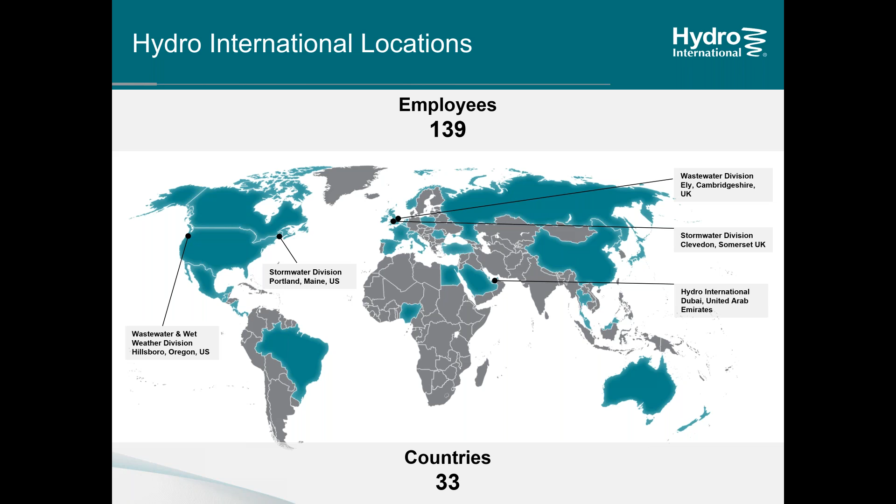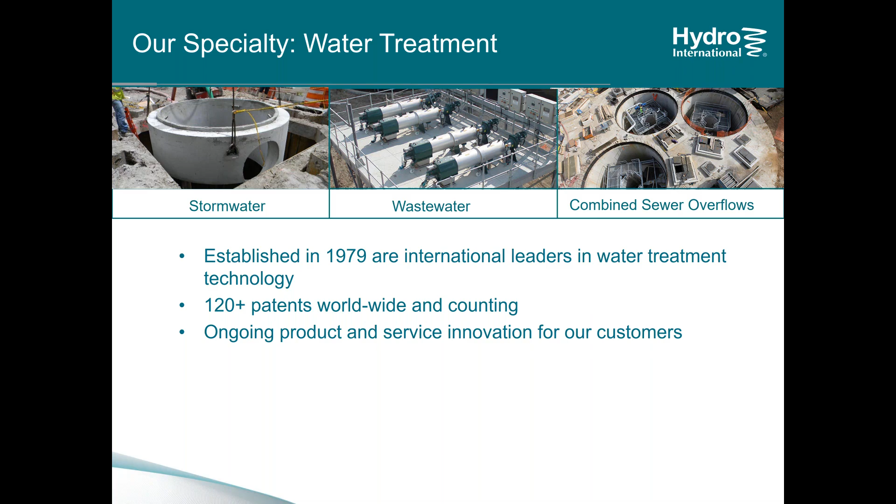Hydro International has installations all around the world. We operate out of offices in England, outside of Bristol, and on the east and west coast of the United States, Portland, Maine, and then outside of Portland, Oregon, in Hillsboro. And Hydro International does water treatment, stormwater, wastewater, combined sewer overflows. We've been at this for almost 40 years and have installations with all sorts of different applications.

In the last 10 years or so, there's been an increase of work on industrial settings, and we're happy to be able to help people in metal manufacturing and scrap yards and things like that manage their stormwater runoff.

We're able to do this largely because of a laboratory facility that we maintain in Portland, Maine. We have another hydraulics lab in England as well, and sort of a burgeoning one in Hillsboro, Oregon. This laboratory allows us to do product development and regulatory testing in our own facility.

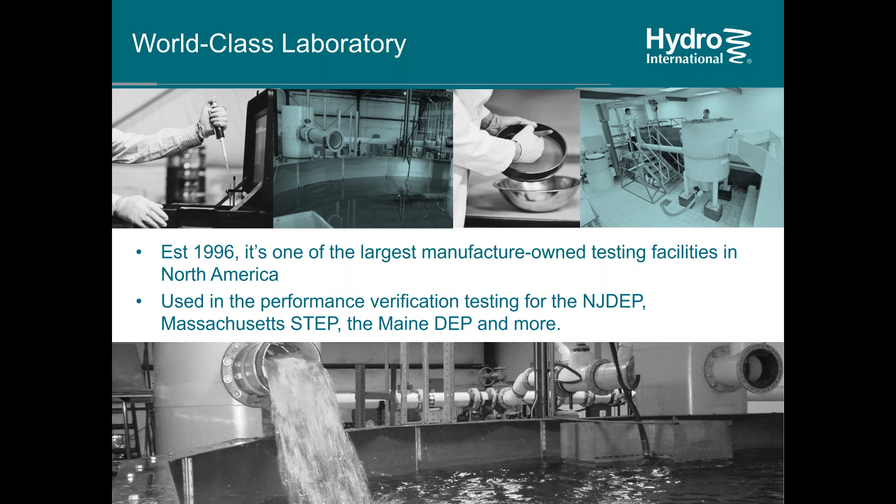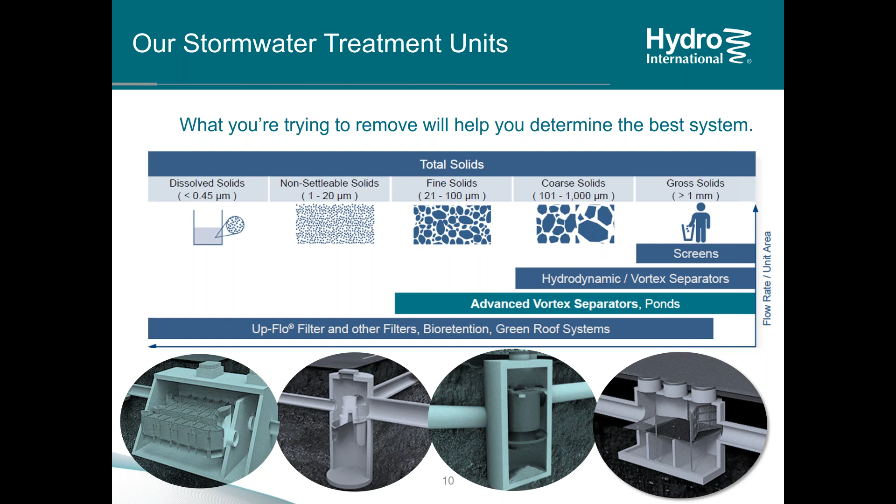Hydro's product offering spans the whole gamut of pollutants. Everything from very large gross solids that can be screened out down to materials that are non-settleable or dissolved and need to be filtered out. Hydro has products for each one of these performance classes. The one I'm going to be talking about today is the Up-Flo filter, and it's shown here in this computer rendering undergoing some maintenance, but this is the product that we use for stormwater filtration.

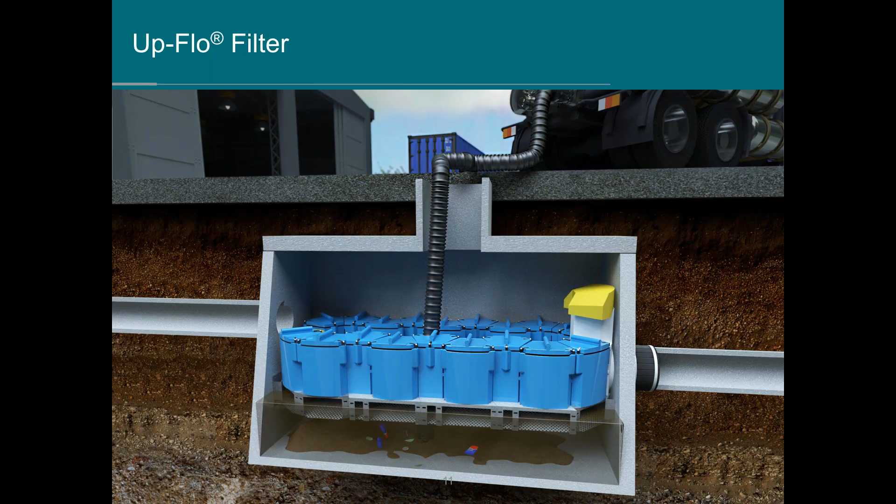And I'll just give a little bit of a sense of how this product works. It's pretty simple. The flow comes in through an inlet pipe, in this case marked A, and enters into a vault or a manhole and fills the sump underneath these blue filter cartridges. And in the Up-Flo filter, just like the name says, the flow comes up through the filtration media and is collected in sort of a manifold at the top of the modules, and then passes out to the outlet pipe marked H.

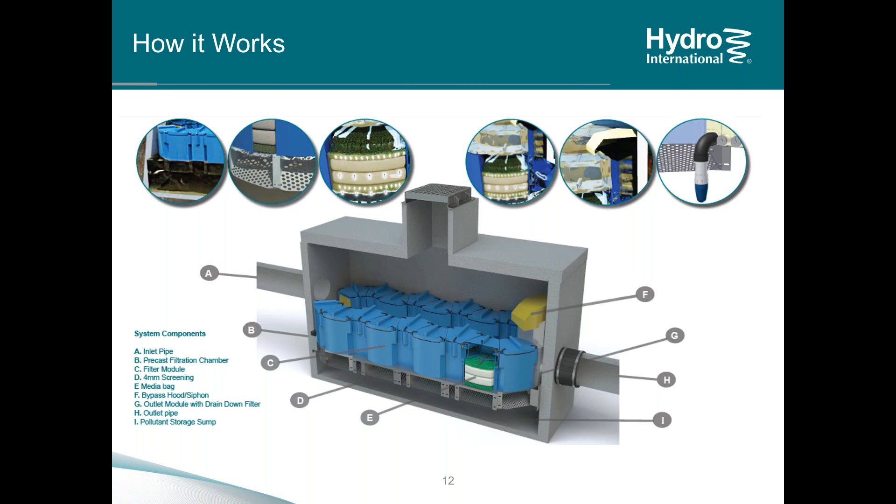The reason why we use upward filtration is essentially to improve maintenance longevity. You don't need to do maintenance as often. The filter material lasts longer in a fluidized condition, in a fluidized bed.

The technology was developed by Dr. Bob Pitt, who recently retired from the University of Alabama. He developed this, and if you were to Google Dr. Pitt, you would see lots and lots of papers that he has published during the development of this technology. Hydro purchased the intellectual property from Dr. Pitt and commercialized it as the Up-Flo filter. He developed it for the EPA as this product called the Multi-Chambered Treatment Train.

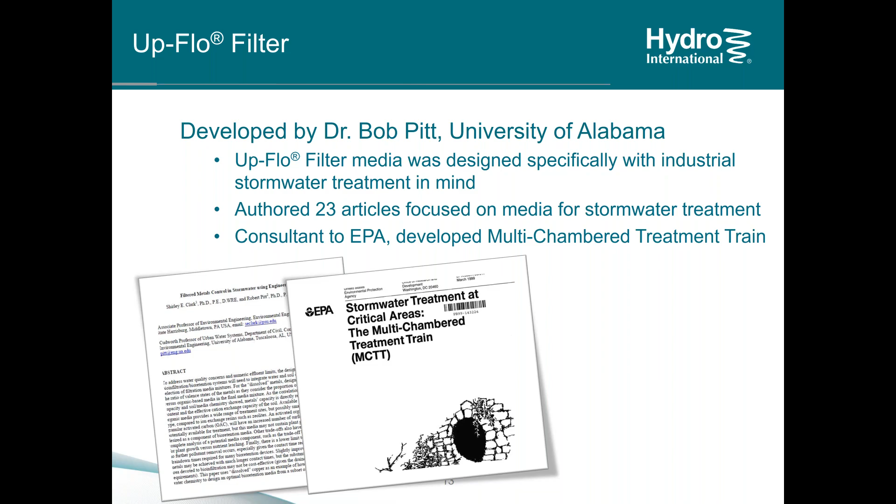The media that he developed is called CPZ, and it's not a secret. It's C for carbon, P for peat, Z for zeolite. It's manganese-coated zeolite, and this is a filtration media that's a little bit of a Swiss Army knife. It was designed by Dr. Pitt to do a little bit of everything pretty well.

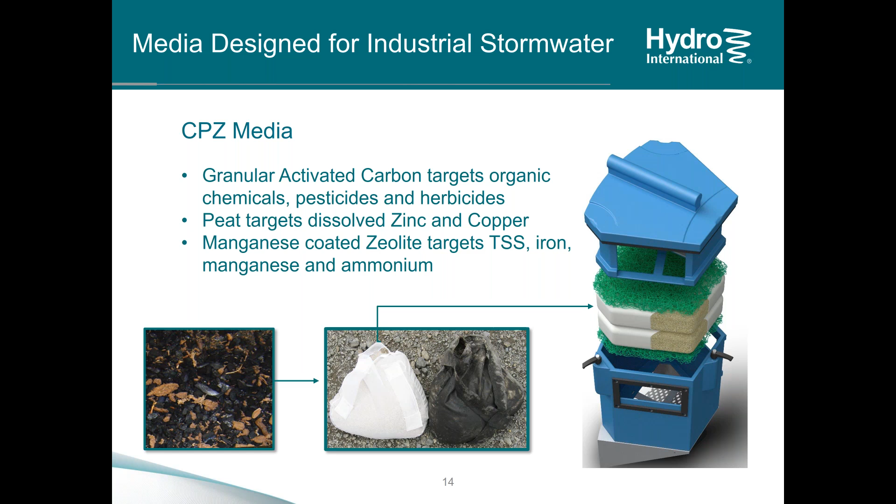And you can see this has a picture here of a fresh media bag and a spent media bag. This is the media that we deploy on industrial sites, mostly because we don't know necessarily what we're going to see for pollutants, and we know that this media does a good job in a range of different conditions.

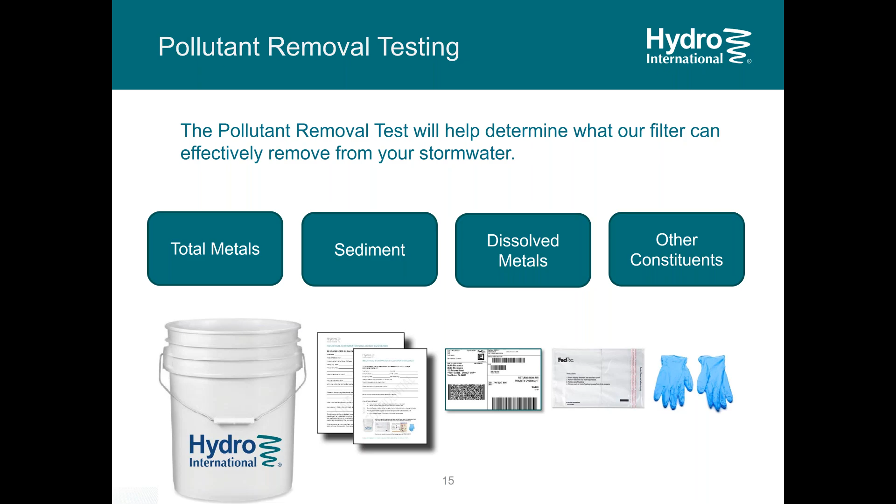So about a year ago, Hydro started a pollutant removal test program. When inquiries would come in for the Up-Flo Filter for an industrial site, we would say, let's send you a test kit, and that test kit has a bucket, some forms to fill out to describe your site situation, and some shipping labels. Essentially, this is all a way for you to take a sample from the end of pipe and send it to Hydro, and we would run it through a test.

The test was a column test, and we have a column test rig set up, one on the East Coast and one on the West Coast. So depending on where the site is, we might change where you ship it to. This column test was designed to be analogous to a full-sized Up-Flo Filter. It has the same depth of media in the column, it is loaded at the same loading rate as an Up-Flo Filter, and it has the same flow distribution. So the idea is we can use this column test to make some estimates about how the actual full-sized unit would perform.

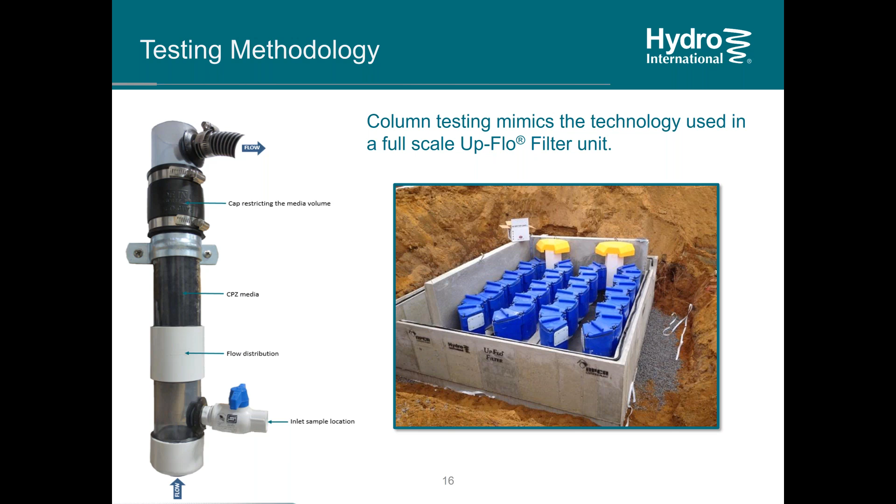The next step is Hydro will take samples from the influent of that column and a subsample from the effluent of the column, send them off to a third-party laboratory for analysis, and put together a report. This report would go back to the potential client and would give some indicator about whether the Up-Flo Filter and the CPZ media was appropriate for that site runoff or not. We've done lots of these reports and column tests for potential clients.

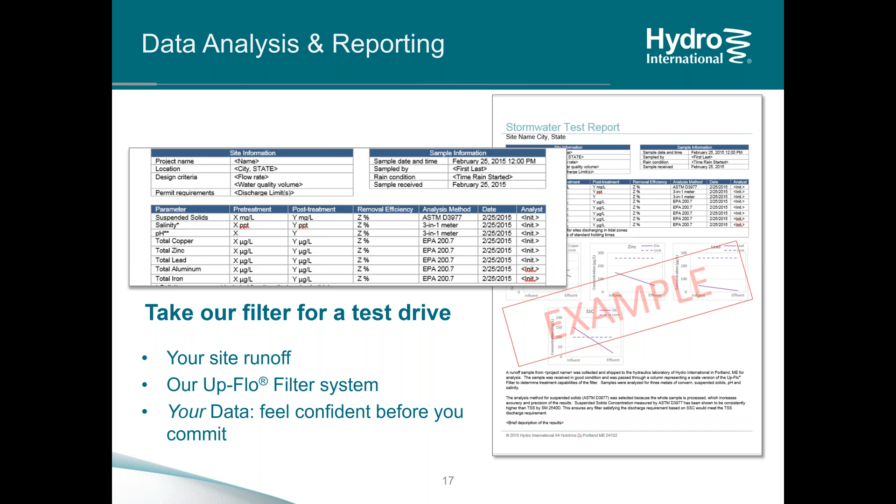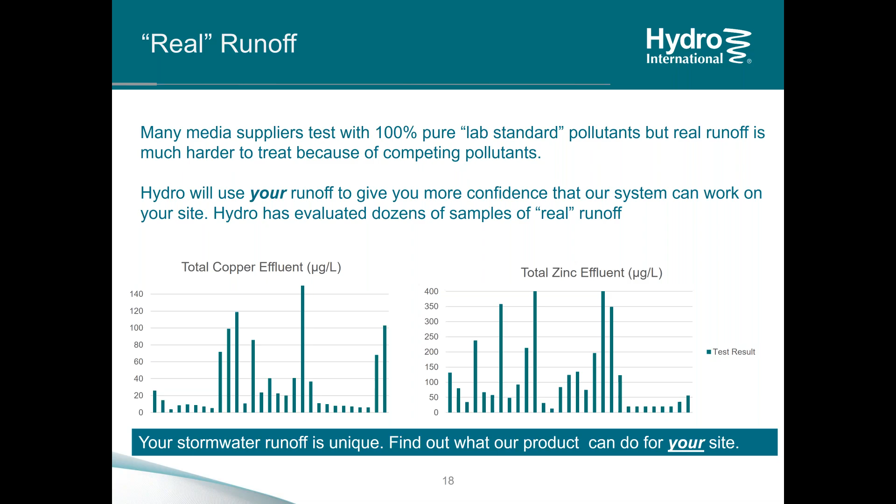Or sometimes you'll hear people say that they're using real runoff spiked with lab standard. It's sort of the same thing: you're diluting your real runoff with lab standard. We feel it's important to use actual runoff, best case, the actual runoff from the site that's being evaluated.

Why is this so important? The fact is that I don't have a chemistry background, so I've got a few points up here that people have told me are the theory behind how the media works. My background is mechanical engineering, but I'll just explain quickly. The media has certain adsorption sites, and people on this call might understand this better than I do, adsorption sites that pick up the pollutants through ion exchange. So if you have real runoff, you have lots of different ions competing for the adsorption sites on the media, competing with the metals of interest. And so that becomes complicated.

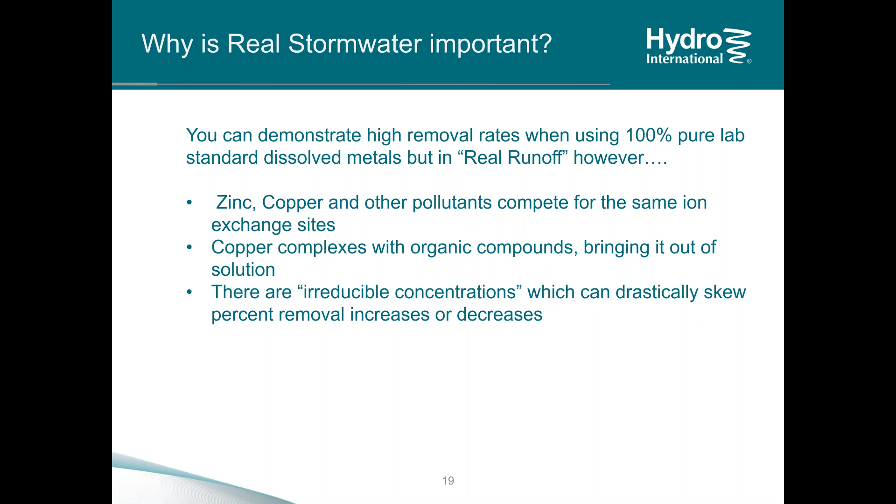Also, copper has some ways of binding to organic compounds that can make it difficult to remove. And then there's the issue of irreducible concentrations, which I'll get into in a couple of slides.

So over the last year, we've collected 31 discrete samples from 6 unique locations. All 6 of those locations have been in California, primarily because that's where the regulatory drivers are strongest. We have 4 different industrial applications: scrap yards, metal manufacturers, food manufacturers, and then 1 municipal client that is discharging to a sensitive ecological area, so they're concerned about their metals. We have samples from fall, winter, and spring.

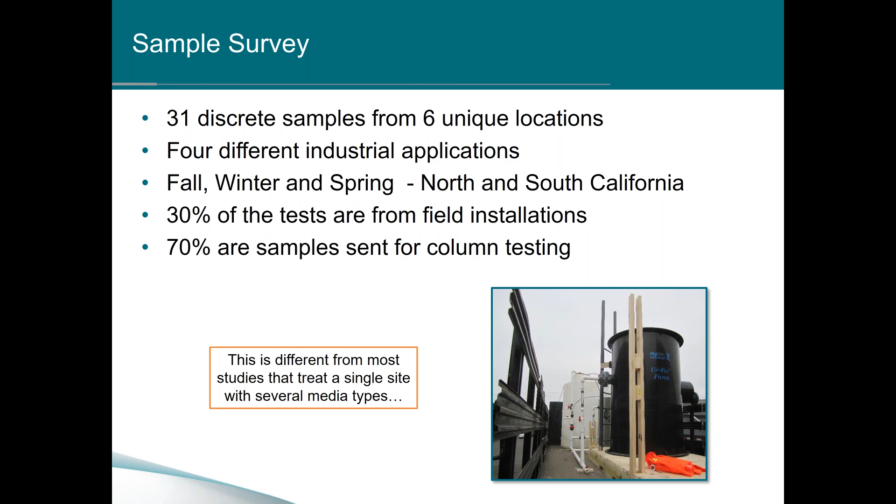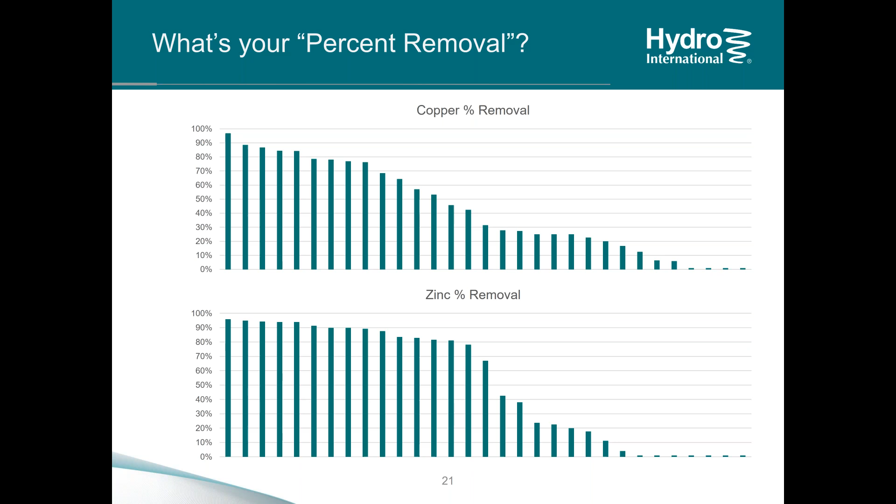And I could even give some kind of statistical understanding of there's a max and a min and a quartile and this sort of thing. But still, it's not a great way for anybody to predict performance. Percent removal implies that you have a linear relationship, a clear correlation between your influent concentration and your effluent concentration, and that 100 micrograms per liter will reduce to 20, and so 1,000 will reduce to 200, and 10 will reduce to 2 every time, and it's just not going to happen that way.

There's irreducible concentrations. When you get down to some very low numbers, you are going to see lower percent removals. And if you have very high numbers, it's very easy to show good removals. In fact, what you'll often see is people spike their test solution with higher concentrations so that they can show a better percent removal. So, okay, percent removal maybe is a tough way to predict performance. Is there a better one?

I'm just going to drive this point home a little bit more. Each one of these green dots here represents one of our 31 test cases. If percent removal was a good indicator of what we were seeing for performance, all of these points would be along a line with a linear relationship between your influent concentration and your effluent concentration. Clearly, this is not true.

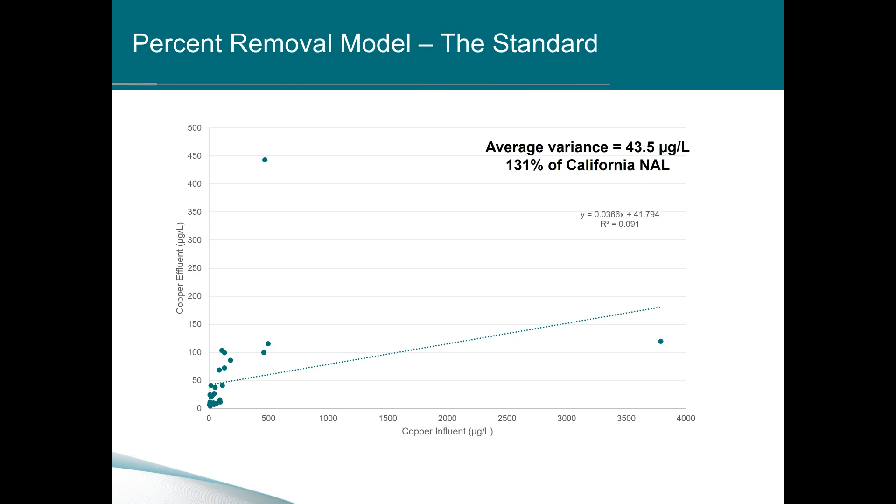There are other ways to predict performance, but none of them are much better. You might think, well, maybe loading rate is a good way to predict performance. You put more water through the filter, it's not going to perform as well. Yes, to a certain degree, but still the variance is high enough that it's not a particularly useful predictor.

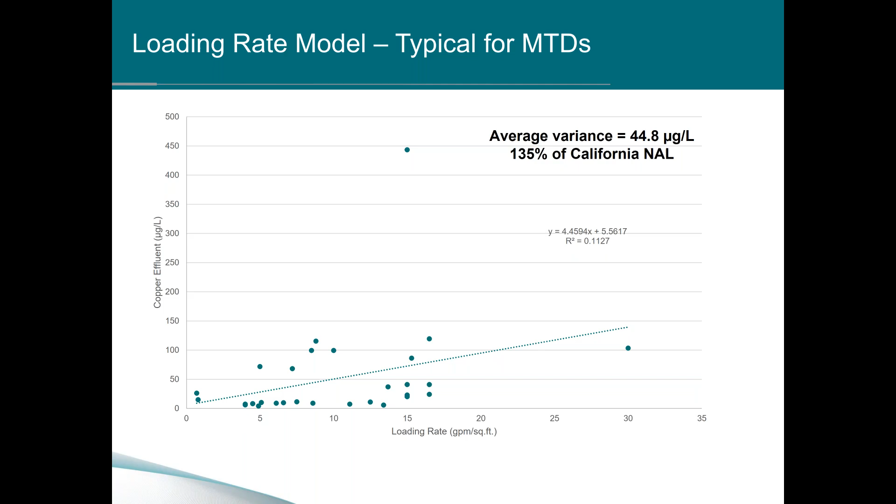And you might use some of your theory, and maybe you've studied this enough to know, well, total metals usually come in a particulate fraction and a dissolved fraction. And a higher particulate fraction is going to be easier to remove. So maybe a high TSS concentration coming into the system would give you better performance. That doesn't necessarily show good correlation either.

So what do we do? What we did is use a multivariable model, which is a statistical tool that allows you to take several linear correlations and roll them all together into one large expression. And we use a statistical package called R. You can get to it from this link shown here.

It's an open source package. It's pretty easy to use. There are lots and lots of online courses to show you how to use it. I recommend this one at Coursera.

It's an excellent one. What this statistical model does is, to use a big word, it produces a phenomenological model, easy for me to say. And this is a model that is not really based on theory, but it's informed by theory. It's an empirical relationship that really just describes how the system behaves.

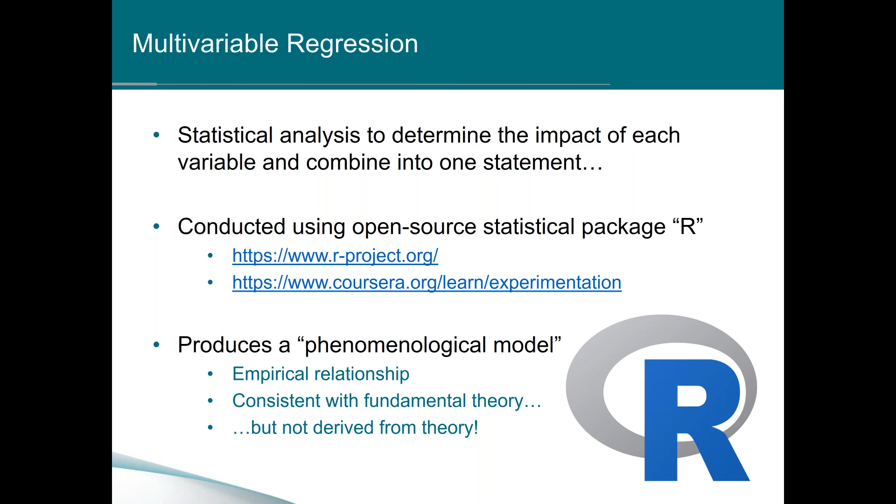So this is the fit we get from the multivariable model, and this is something that is actually useful to us. We have an average variance of about 4 micrograms per liter. This is copper, and this is a plot where we have test results on the x-axis and the model result on the y-axis, and if they tie up, they fall along that line. So that's 11% of the California NAL.

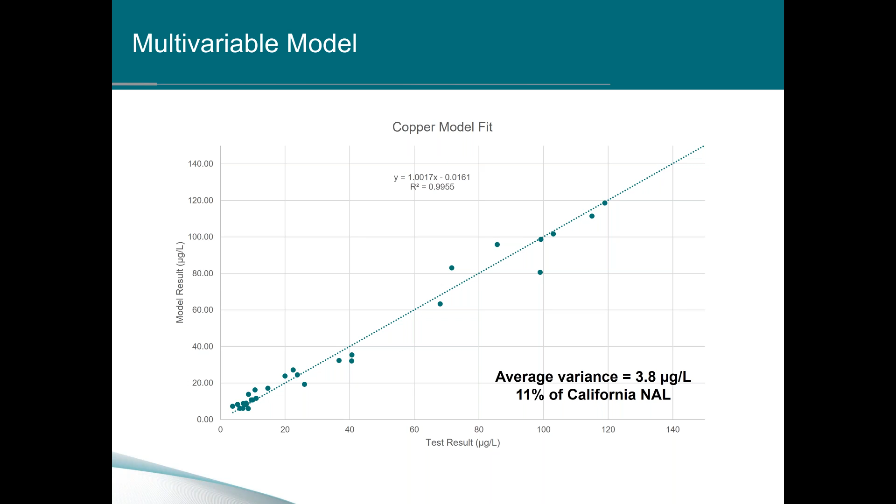That's pretty useful. The zinc has a little more scatter. Our average variance is 22.5 micrograms per liter, but the California numerical action limit for zinc is 260 micrograms per liter, so we're still about 10%. So that's a useful model for us.

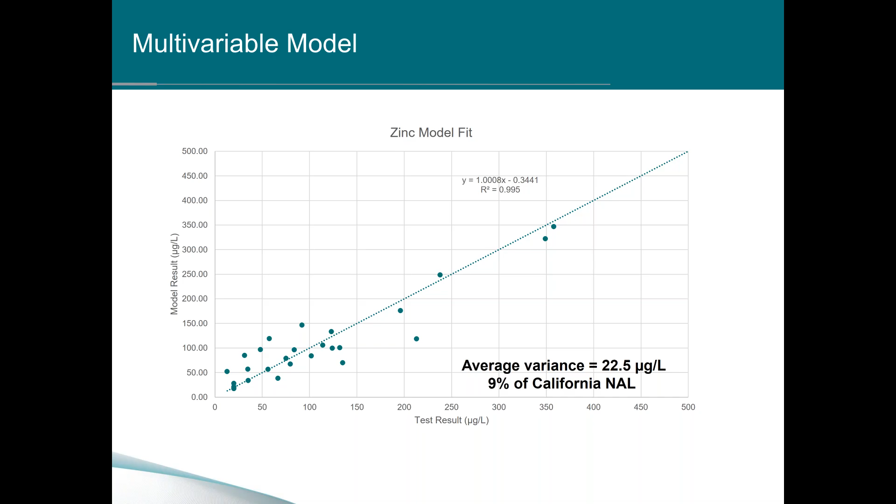Now, when you're putting together statistical models, there are some best practices to follow. And one of them is that with statistics, you can sort of make them say whatever you like if you cherry pick your data going in. So the cardinal rule is thou shalt not cherry pick.

These are all of the 31 influent concentrations that were used to make up our model. And you can see in our model we're relying on 4 variables: copper influent, zinc influent, TSS influent, and the loading rate of the system. And on these 4 charts, the left axis, the y-axis, is a logarithmic scale.

So there's quite a bit of variance in the copper and zinc concentrations. Copper is just less than 3 orders of magnitude. Zinc is a little more. There's one very, very high entry there. TSS is maybe a little over 1 order of magnitude variance in our samples. Loading rate we have some control over, so that really doesn't vary quite so much. Really, it's just very close. So every one of these data points was used in the model with no selecting.

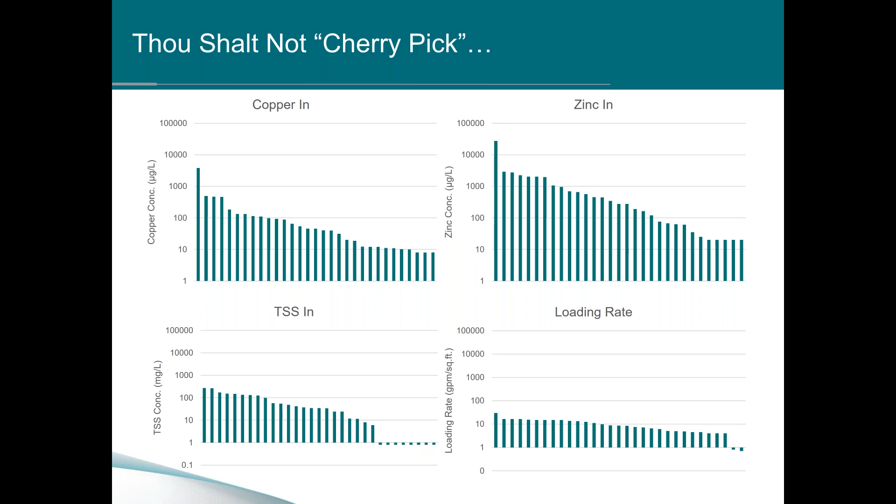Only it does it not only for one variable, but for every variable you ask it to, and every possible product of those variables. And it makes an estimated coefficient for each one of those situations. And so you end up with 15 estimated coefficients and an intercept. And it puts this into one long expression. And that's what you get out of your statistical software.

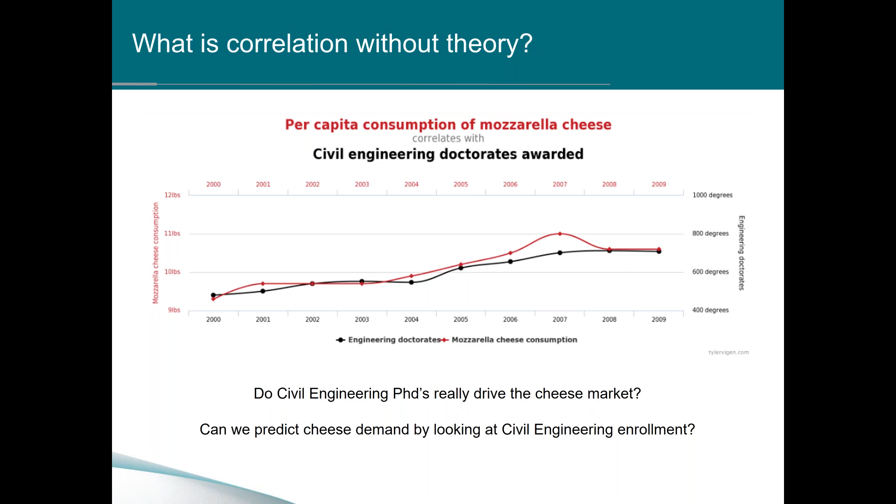You would not actually look at this and imagine that PhDs drive the cheese market, or you could make some sort of prediction about cheese demand by looking at the enrollment in engineering programs. But knowing all of that, we have a lot of confidence in the model that we've developed because the 4 independent variables that we've chosen, copper, zinc, TSS, and loading rate, theoretically should make a difference on the performance of the filter.

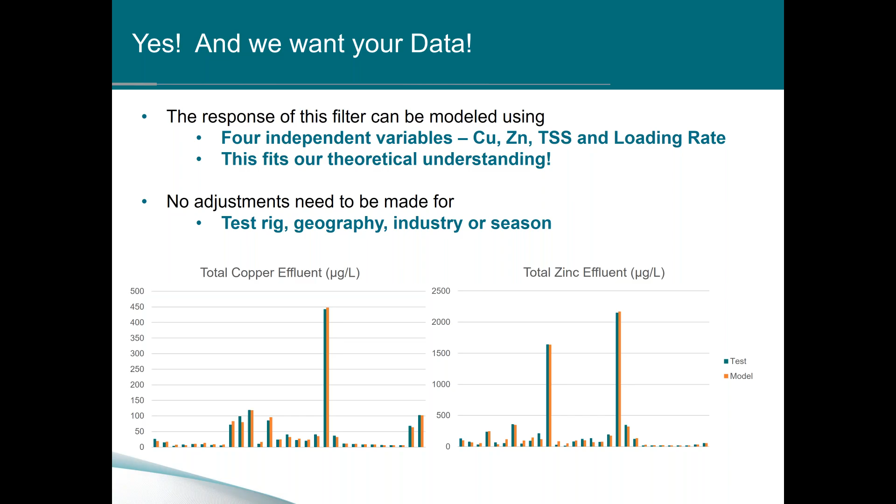Not only that, we were able to do what we did with the model without making any concessions for test rig, geography. For example, there's no flag in the model that says, oh, this is a scrapyard, so you have to adjust the model this way, or this was done in a full-scale unit, or this was done in a column unit. The only variables involved are the ones that theoretically should make a difference.

So I'm going to go through sort of an example of what happens when we get an inquiry and we use this model to make some predictions about performance. This is an example from an industrial dairy. They came to us with some numbers. They said, well, our TSS is around 150 milligrams per liter. We have a range of zinc concentrations that we're trying to reduce that go from 600 to 1200 micrograms per liter. We don't have much issue with copper.

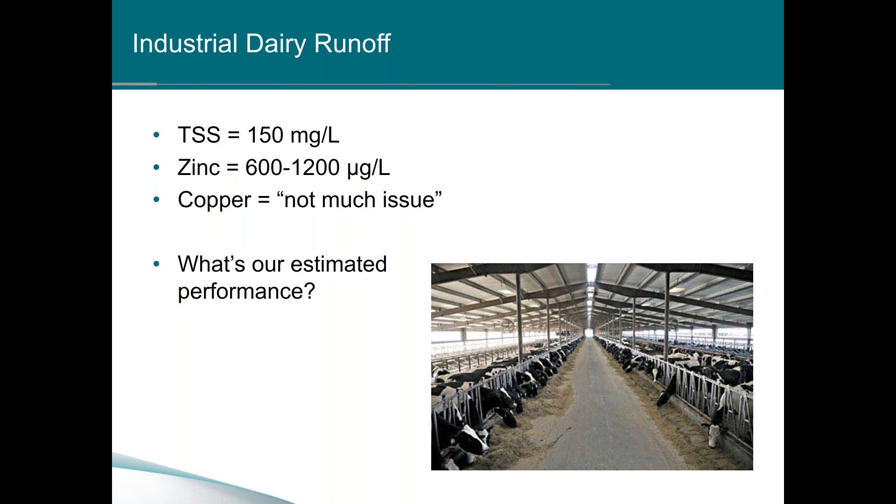Okay, I'm not sure what that means, but let's go on. And they want to know, what's the estimated performance? This is not their facility, but I'm guessing maybe it's similar with galvanized roofing and the zinc is coming off there. It's possible. So the first thing we do is look at these concentrations that are going to be the potential influent and say, is this something that is in the family of our model? Have we seen this sort of thing before and cooked it into this algorithm?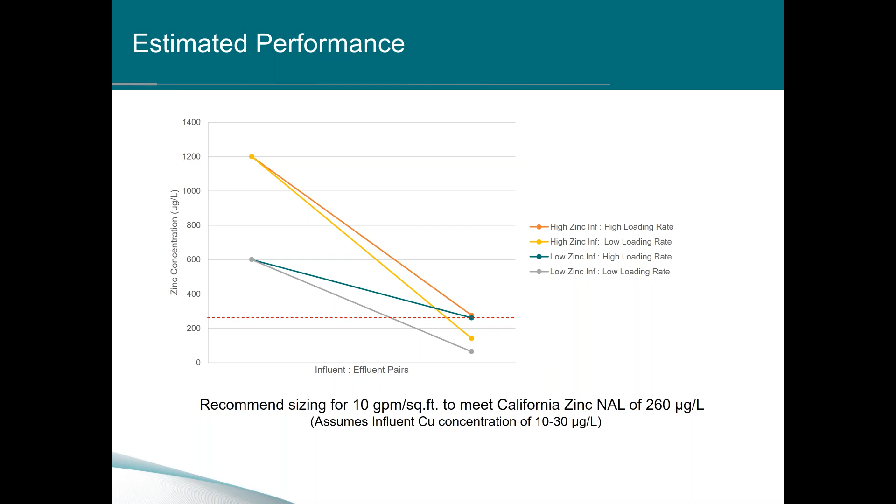So just a few conclusions here, and then I'm going to wrap up. Estimates of filter performance on an industrial site should really be based on real runoff, not some kind of laboratory standard or a spiked sample. Preferably, if you can get it, get a sample with your own runoff, because every site has unique chemistry, and you really need to know what technology is going to do with your water.

Percent removal is maybe a very, very rough shorthand of how a filter is going to perform, but a better estimate of performance is something that takes into account more than one variable. We use 4 variables, and on average, our copper correlation is within 4 micrograms per liter.

If statistical packages are not part of your toolkit yet, I think the online learning has happened sort of on the back of the big data movement that's underway right now. There's lots of good online learning, and I highly recommend it as a tool for anybody who has to deal with large amounts of information, and it could really help your runoff program, your stormwater program.